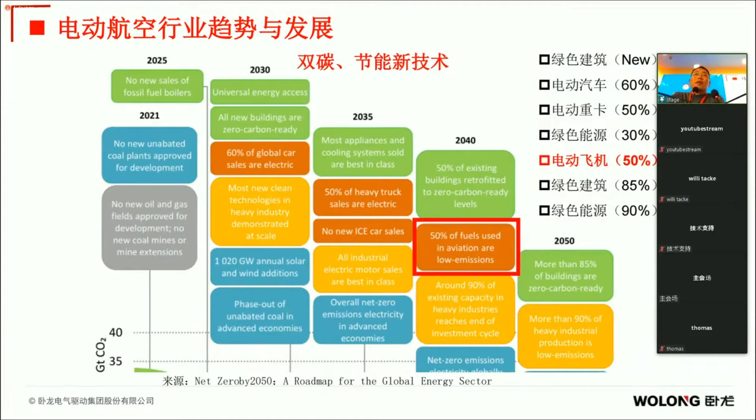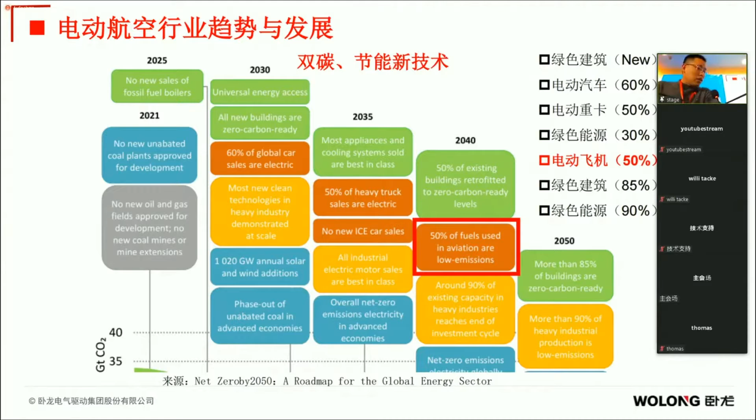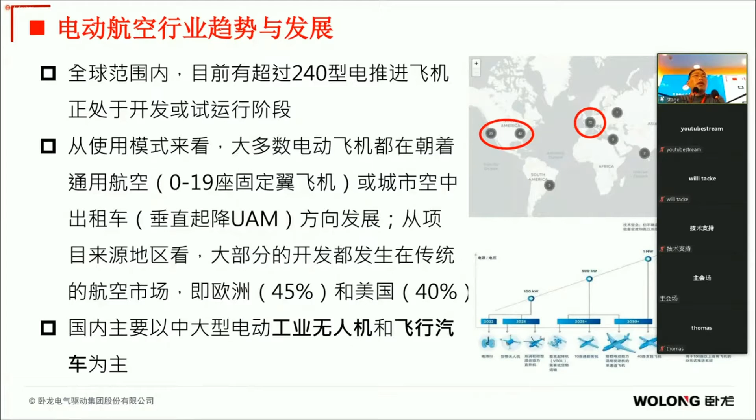First, the development and trends in electric propulsion systems. We have the dual carbon strategy - by 2040, e-flight demand will increase greatly by 50%. Worldwide we have more than 240 types of e-planes, and in China we have industrial UAVs and flying cars.

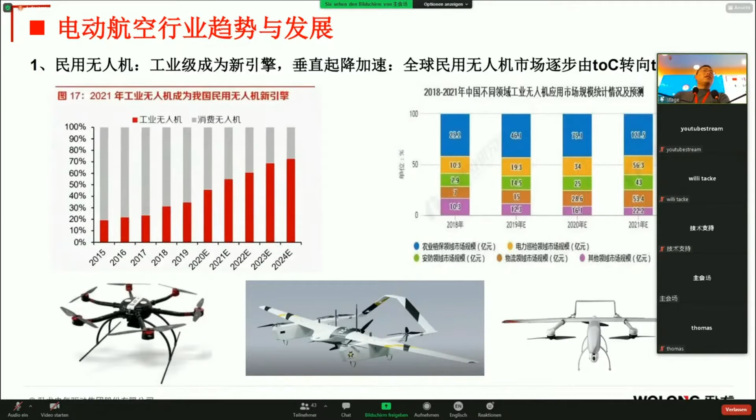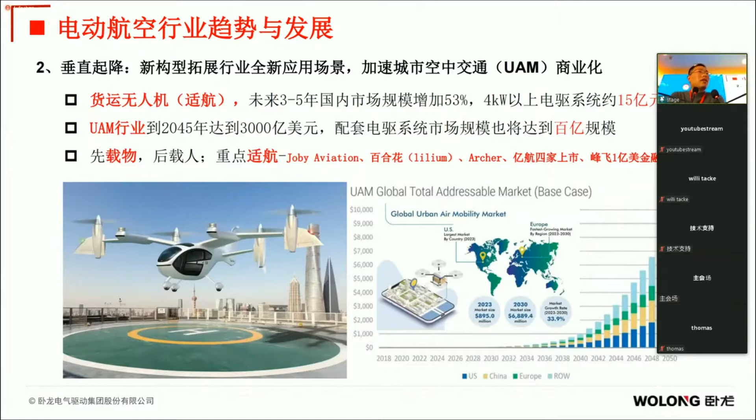For the civil UAV sector, we are transforming toward the 2B market. For vertical takeoff and flight, we have new application scenarios, and we are accelerating the commercialization of UAM with a lot of investment being poured in. This is a list of pictures showing the structures of the e-planes. In civil aviation, we are also undergoing transformation with electrification going on.

We will have hybrid systems first, then pure electric systems - electric drive - then the technological requirements for e-aviation. First, in terms of motors, we have requirements for performance.

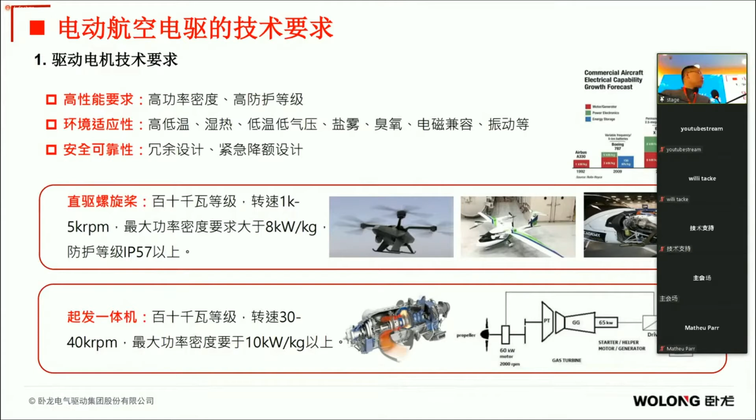I think the first requirement is the weight of the motor, then adaptability to the environment, and also redundancy design. For the direct drive propellers, regarding intensity, the power requirement is over 8 kilowatts per kilogram, and the rotation speed is about 30 to 40,000.

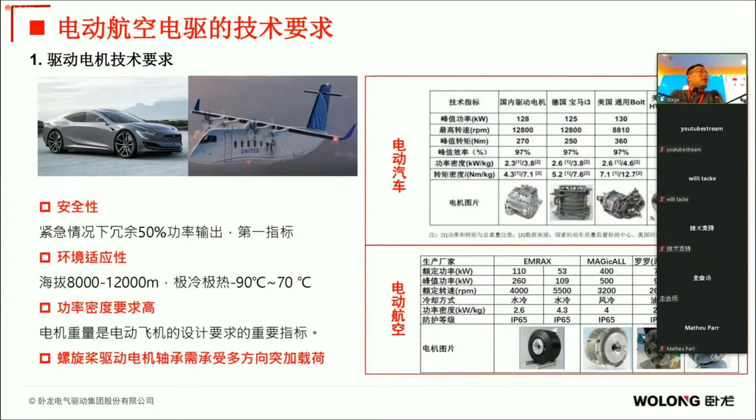So we can compare the motor of the plane to electric vehicles. The power intensity for the car is about 2 to 3, however for e-planes the requirement is about 5 to 6.

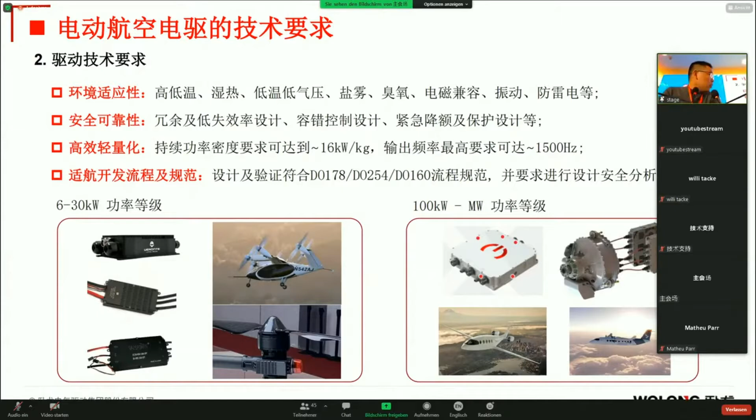Then the driving control systems and controllers - I think we have the same requirement for the controllers in terms of power density. It should be over 16 kilowatts per kilogram, and the output frequency should be 1500 hertz. We also have 6 to 30 kilowatt products in the market, and on the right-hand side, we have the 100 kilowatt to 1 megawatt power class.

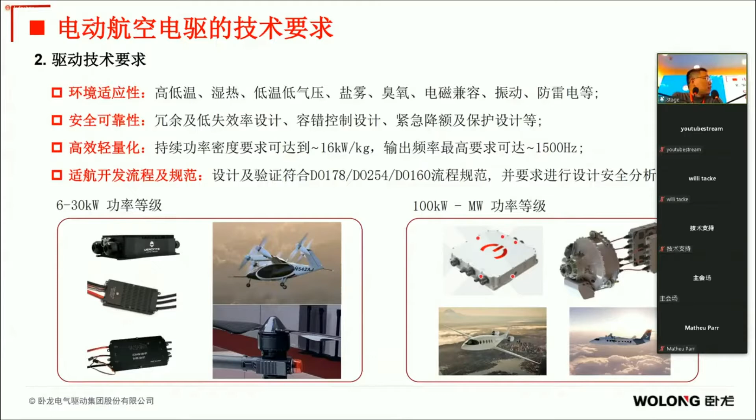For the controllers, we also have a comparison between planes and cars. For the controllers of the plane, they don't have high requirements for power, however for frequency, it should be doubled compared to the car.

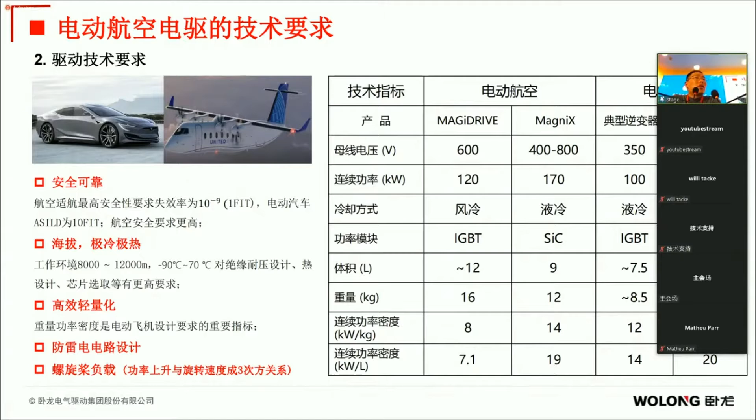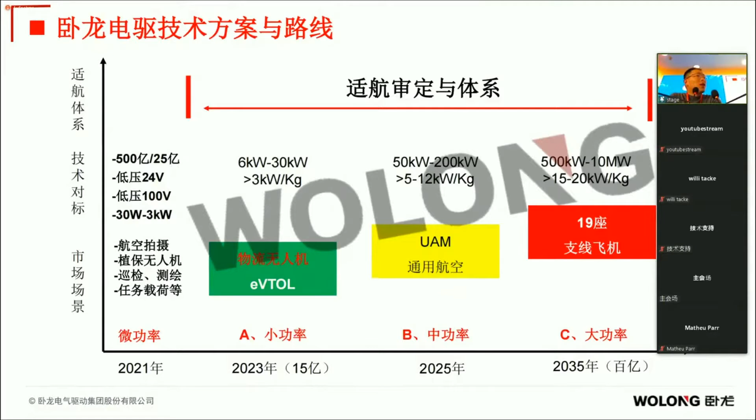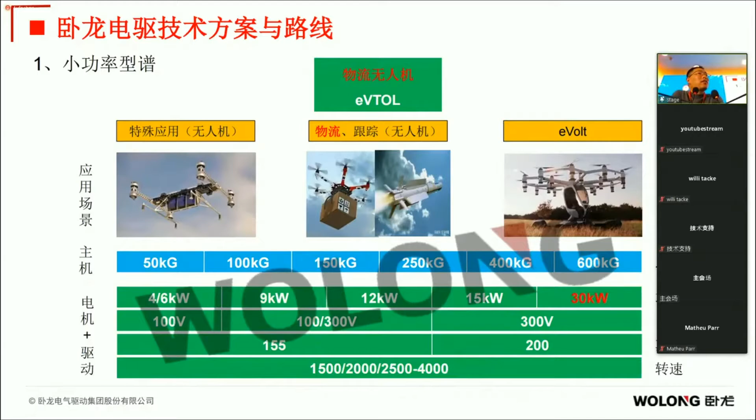And then the technology and roadmap of my company. We take into account the certifications, and we look at the plans for small, medium, and big power electric drive systems. The power can be 4,000, 9,000, 12,000, and even 30,000 watts. And the voltage ranges from 100 to 300.

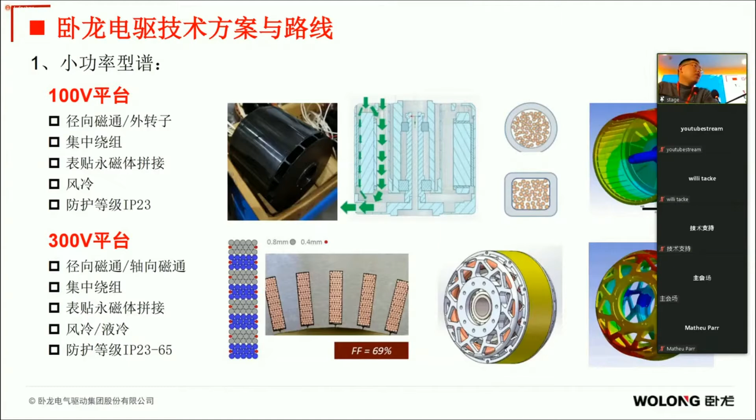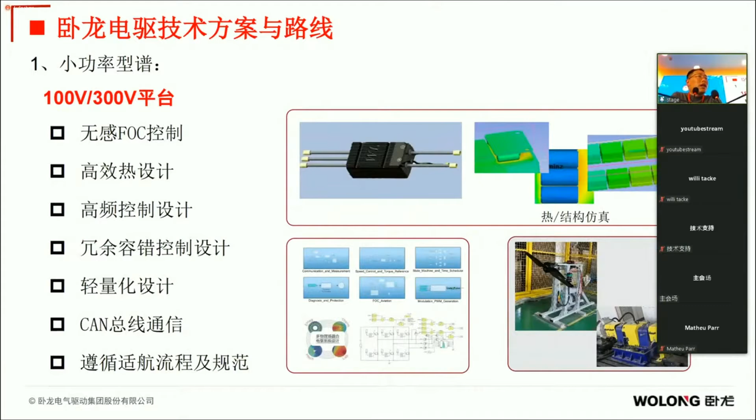We use the topology of radial flux combined with outer rotor for the 100 voltage, and for the 300 voltage we mainly use radial flux. We're transforming from IP23 to IP65 in terms of the protection class. We also have sensorless FOC control and high efficiency thermal design.

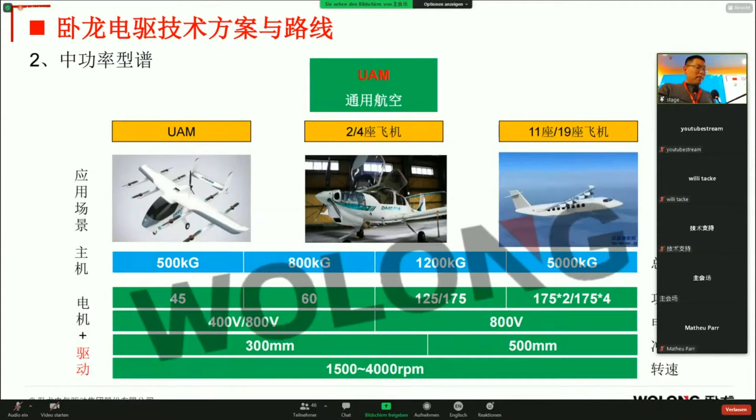In terms of the power supply, we are transforming from 45 kilowatts to 500 kilowatts, and the voltage is 400 or 800.

For the propulsion roadmap, we mainly use radial flux, and we also use flat copper wire winding and surface-mounted permanent magnet Halbach arrays. We have the 125 kilowatt design model, and in the middle we have the 70 kilowatt design models.

And for the medium power controllers, we use silicon carbide components.

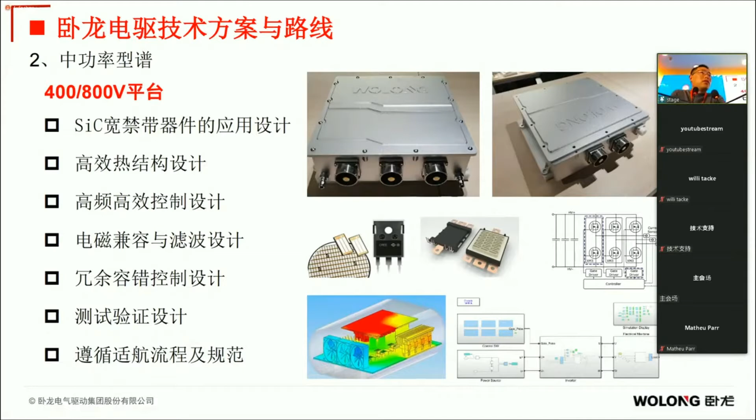For example, we have the pictures for the 100 kilowatt and 70 kilowatt electric motors, and we have tests of the e-motors, and we are upgrading the controllers. Currently, in the first half of 2021, we will have a 200 kilowatt sample motor launched.

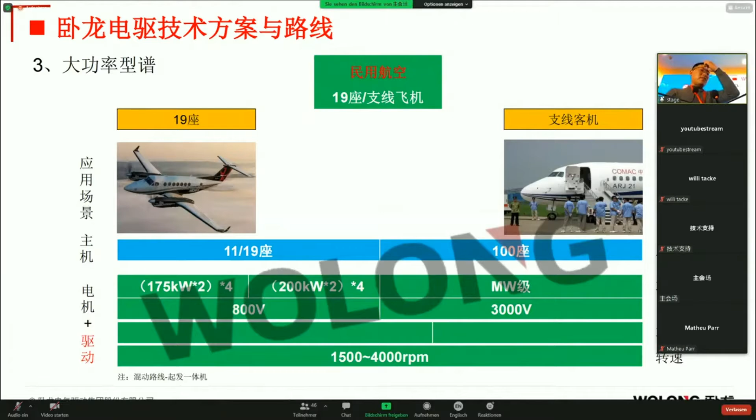We also have the million-watt class motors. For the technological roadmap, we mainly use parallel medium power motors for redundancy. And for machines over 1 million watts, we are making technological preparations.

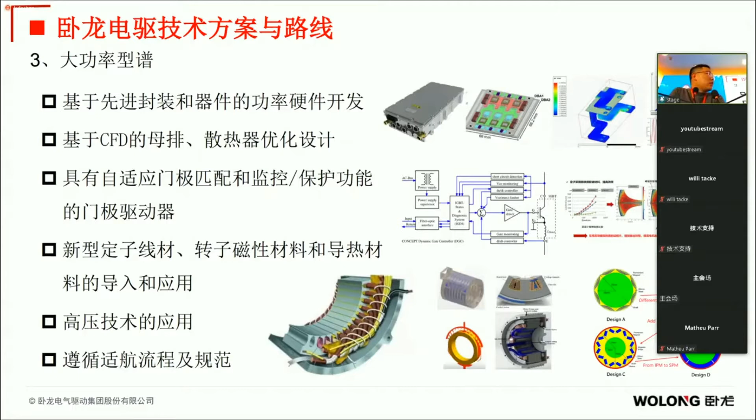And now about the conditions for Wolong electric propulsion and some cases. Actually, we have a lot of business over the world, with 57 subsidiaries and 39 manufacturing bases.

For products, our products are used in home appliances, special large motors, industrial motors, large size motors, and EV motors. We have output from motors of about 12.5 billion, the second largest in the world, and we are also working hard to become the largest in terms of motors.

In October 2018, we established the Global Center Research Institute focused on technological development. We have research centers in Shanghai and Shangyu, Zhejiang province, and we also have centers in Europe, Japan, and the US.

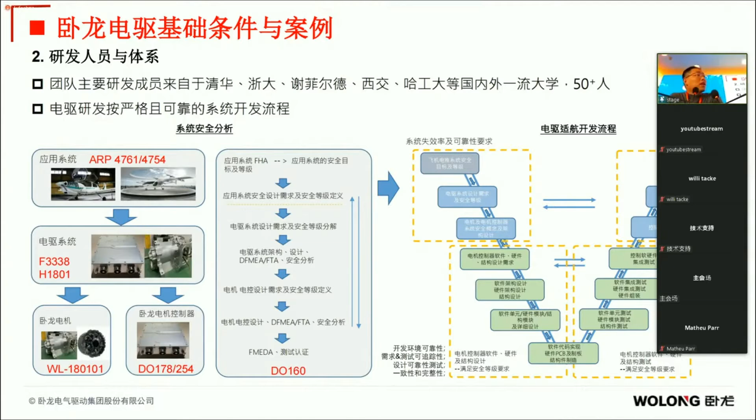Currently we have 50 staff for technology domestically, and for the e-motor products and certifications, we are developing e-propulsion systems.

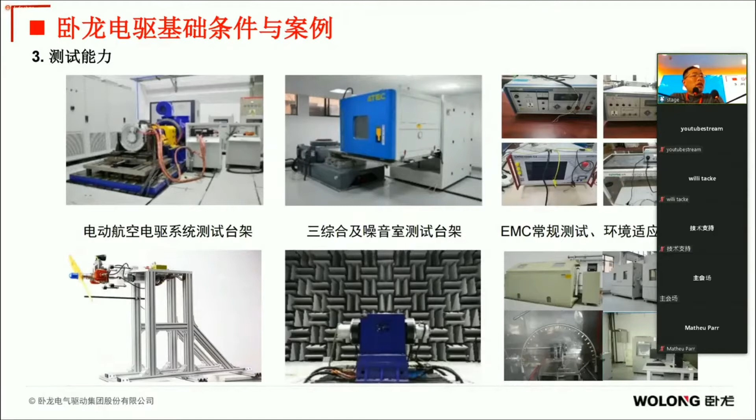And this is our lab capacity. We have supporters for different temperatures and humidities, and also propeller test supporters.

We are really honored to become a part of the technology setting committee for e-flight. We have compiled 23 documents on technology for e-flights, for example the 1801 technological protocols. We are also making new preparations for the new technological requirements of e-flight.

We have small size production and also large size manufacturing going forward. And those are our patents and papers. We're also cooperating with famous universities for technological breakthroughs.

Those are the application cases in recent 2 years. For small power, we have the 5 to 15 kilowatt systems. We're cooperating with manufacturers for propeller testing, trial flights, and test flights.

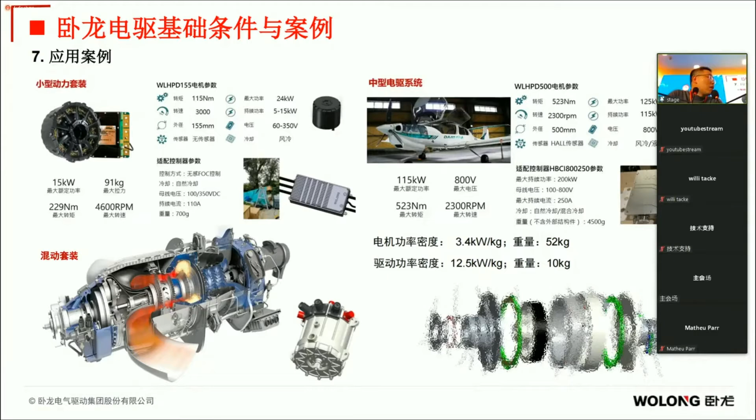In the picture on the left, this is the start and launch integrated machine. At the Shangyu plant in October, we completed testing of the 70 kilowatt motor at 36,000 RPM. As mentioned, the largest power intensity can be over 10 kilowatts per kilogram.

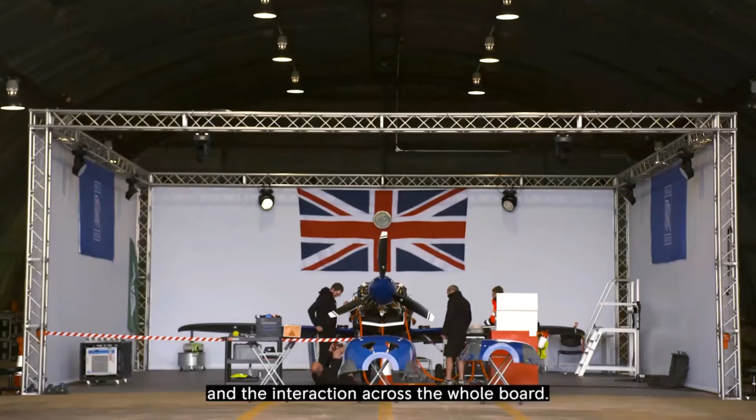This project is an attempt to break the world electric speed record. If you put 550 horsepower in a little airplane like this, it's going to go like the clappers. And it does. It's a great aeroplane to go and break records with, but also to prove the future and the next steps for electric aviation. The key thing about breaking the record is about demonstrating how fast this technology is going, and therefore how soon it's going to be in all our lives. This technology offers us the opportunity to start travelling in a really net zero way. When you look at the team and the interaction across the whole board, the engineers, project management, the ATI, the government, I've never seen a team come together and achieve what this team has done.

We've broken a record that already existed, but crucially, we've broken it by a phenomenal amount. I think it's clearly demonstrating that we're getting into the third age of aviation. Electric aviation is absolutely and utterly here to stay.

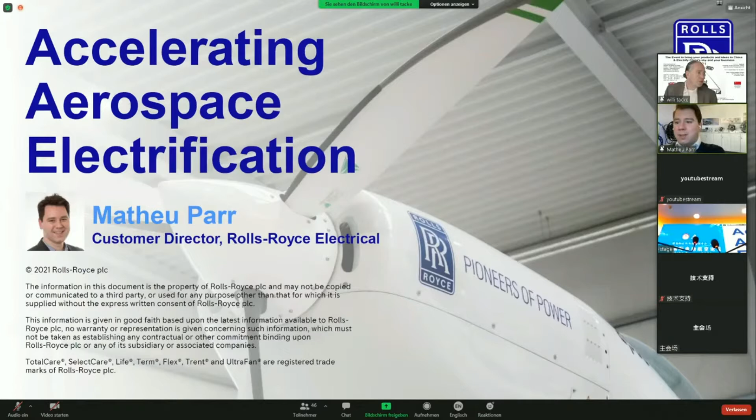Perfect. So good afternoon, everyone. Thank you so much for the opportunity to talk to you today. I'm Matheu Parr, I'm the customer director at Rolls-Royce Electrical. As Willi described, we've been investing in electrical capability for more than a decade now within Rolls-Royce across the marine and land markets. With the acquisition of Siemens e-Aircraft in 2019, we've now put together a world-class team to go and focus on the advanced air mobility markets, a team focusing on urban air mobility and regional air mobility opportunities.

I have had the great privilege for the past few years to be leading the project that you saw in the video, a project to build the world's fastest electric aircraft. We hope this is a project that inspires people, a project that shows what electrical technology is able to achieve today by breaking the record, but not just breaking it by maybe 5 or 10 miles an hour, but breaking it by more than 130 miles an hour, showing just how quickly the technology is moving forwards.

Crucially, we undertook this activity to go away and understand what was state of the art in the automotive industry, understand the baseline technology available, and also work with certification authorities to start to increase their awareness of the technology, since we would need their support to fly the aircraft. The aircraft has now flown more than 30 times, covering more than 2,200 kilometers during its flight test program.

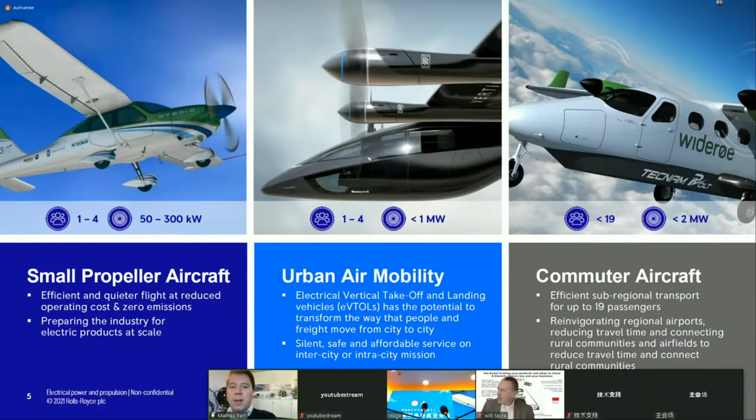Just running through some of the projects that I hope you'll see from Rolls-Royce, and if you haven't, you'll definitely see more of in the upcoming months.

This is the project we are running in Italy with Tecnam called H3PS. This is a hybrid aircraft where we are taking a Rotax combustion engine. We've attached a small 30 kilowatt motor to that Rotax engine that provides the boost power necessary for takeoff, go-around, for key flight maneuvers, but essentially allows the Rotax to run at its most optimum point and improve the fuel efficiency of the aircraft, and equally, of course, improve the range.

There is a battery on board this aircraft, of course, to work with the electric motor, and the battery can be charged in flight off the Rotax as required by the operator. We've completed ground tests of this aircraft. Hopefully it will be up and flying in the next few weeks, and you'll have an opportunity to see some footage of this aircraft flying around the skies of Italy very soon.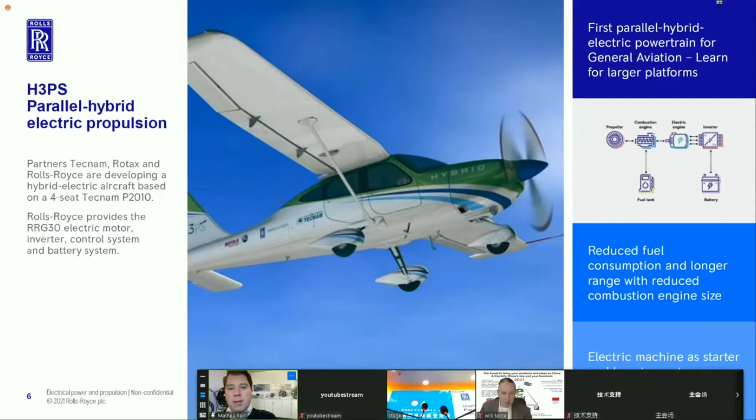We're very proud to be working with Vertical Aerospace in the UK on their urban air mobility platform, the VA-X4. This aircraft targets certification 2024, and on this aircraft, Rolls-Royce will be providing the electrical propulsion motors, the power electronics, and the electric power distribution system. Within that package, we're essentially responsible for the delivery of all thrust off the aircraft and work very closely with our launch urban air mobility customer, Vertical.

However, it is our intent to work with as many urban air mobility platforms as possible. We think our 100 kilowatt lift motor that we are designing for this market segment is highly attractive, offers the best power density and reliability, and we are very interested to talk to all airframers who are pursuing aircraft in this segment. I think the key thing about this market is the range that is trying to be undertaken.

The 120-mile range that is forecast by Vertical, we think is highly credible for what electric aviation is able to offer today, and really sets this aircraft apart from some of the other concepts that are pursuing longer ranges where we struggle to trace through the battery calculations and demonstrate that's viable.

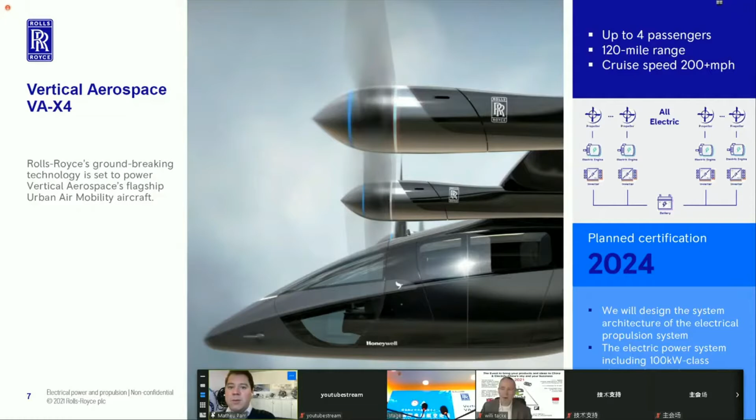The Tecnam P-Volt is another program being run with Tecnam in Italy. It's a 9-seater commuter aircraft, and here Rolls-Royce is delivering the motors, the power electronics, and the battery. This aircraft will have circa 300 kilowatt electric motors on board to drive the thrust, direct drive to the propeller. We integrate all the power electronics into the motor to give a very good packaging, as power dense as possible. This will be the first aircraft to also have a Rolls-Royce battery solution on board, with a range of around 100 nautical miles in 2025.

As battery technology improves, we're looking to extend that range out to about 150 nautical miles by 2028-2030. We see lots of excitement in the market for this aircraft, particularly from airlines who want to learn how to operate an electric aircraft, who have island hopping or short city routes where that range works for them, and crucially it gives them an opportunity to start to understand operation, maintenance, pilot training - how do you start to understand an electric aircraft within your fleet?

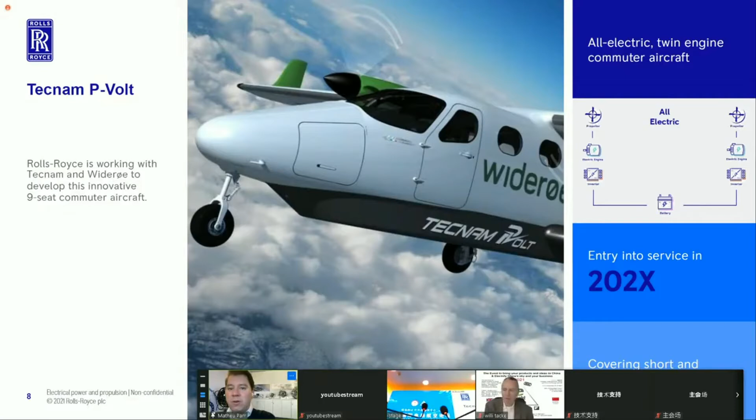For Rolls-Royce, however, when we look at this market, we recognize that the electric propulsion system is only one component of the overall solution. We need to also think about how we are going to charge these aircraft, how we are going to ensure the fast turnaround times that we expect our customers to require to get the utilization of the air asset up as high as possible. We also recognize there are limitations in regional airfields today in terms of electrical infrastructure - there may not be enough energy coming into the sites to allow for all the aircraft that are planned to be charged fast enough and continue operations.

We've therefore invested in a microgrid approach. Working with Rolls-Royce Power Systems in the Rolls-Royce group, we have developed a containerized solution that allows you to install either batteries or hydrogen fuel cells on site, together with the charging infrastructure necessary to keep the aircraft in the air. We think this offers some fantastic benefits in terms of being able to plan and optimize around the energy cost.

To be able to demonstrate to customers that as well as flying in a zero emission all electric aircraft, you are also charging that aircraft in a net zero manner. If we have any issues with quality of supply at the site, that can be assured through the fact that we're bringing dedicated power supply through. And where this is used in combination with renewables, with solar or wind, it also offers a regional airport the opportunity to start to generate electricity and then sell it into the grid to generate new revenue streams.

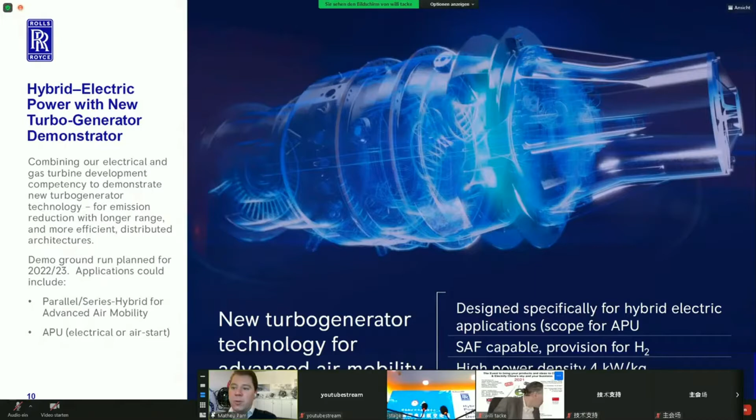I mentioned at the beginning as well, we are not just focused on all electric solutions, we are also focused on hybrid electric solutions. We are currently investing in a turbo generator demonstrator where we are designing, we believe for the first time, a gas turbine together with electrical machine specifically for the urban air mobility and the regional air mobility market segment. So we're taking in requirements from customers - what do they see as the turbo generator requirement in their market segment - and feeding that into a design program.

The gas turbine itself, we believe, is targeting market leading power density at 4 kilowatts per kilogram for the full integrated system. We are going to ensure that the machine is capable of running on sustainable aviation fuels and also have a provision for burning hydrogen, should that be the decision that the platformer wishes to take. Of course, this machine is also ideally suited as an APU in larger aircraft, and we're engaging with customers right now to get more about their requirements and be able to feed them into our design activity.

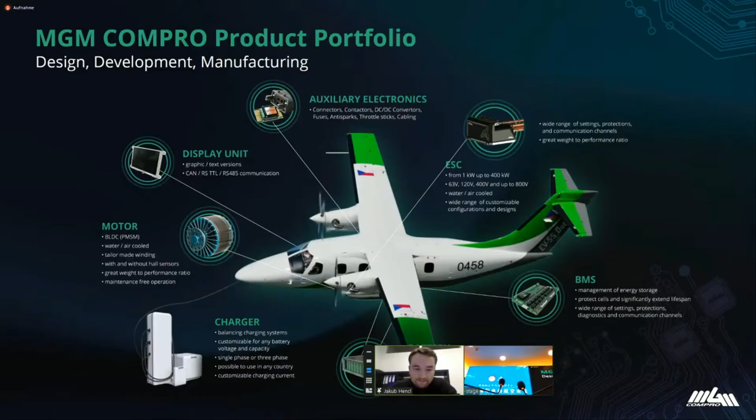Willi, please, next slide. So here we can have a look at the different fields of e-aviation we're active in. Right now, a very famous field, the eVTOLs, where maybe more than 150 projects are active. MGM Compro is running 15 projects here, where the motor power ranges from 20 to 80 kilowatts in general. We can say that this is really the forefront of e-aviation technology, and all the major players are active here. So we try to catch up with them and come up with complex solutions for e-propulsion systems. The field where it started, I would say, was in 2011 with the first Airbus projects of electric aircraft.

It's a light sport aircraft, or we can say the UL 600 kilogram category, where we have already 21 flying projects. Some of them are going towards serial production, some of them already quit, but this was a field where we gained a lot of knowledge.

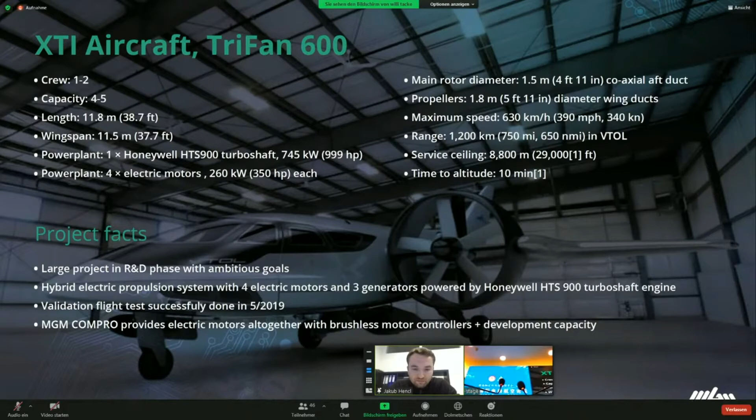This is, I would say, one of the biggest projects we work on in the field of eVTOLs. This is the XTI Aircraft TriFan 600. This is a very ambitious, large project. There's also close cooperation with Honeywell, and the hybrid electric propulsion system should include 4 electric motors, which is our part. So we deliver the motor controllers plus electric motors with a very sophisticated control system and controller firmware, which is very customized for this particular purpose. Next slide, please.

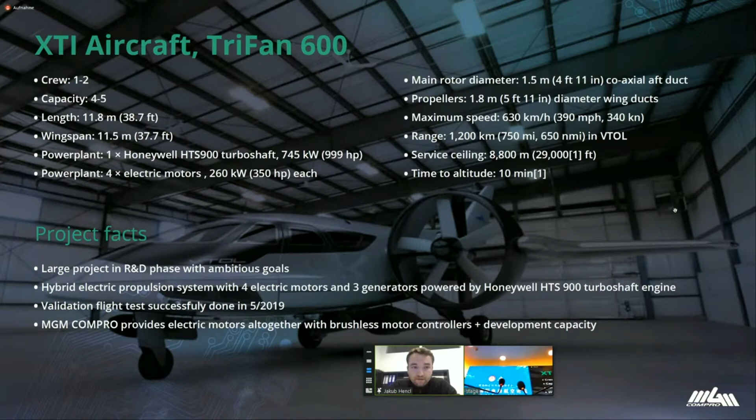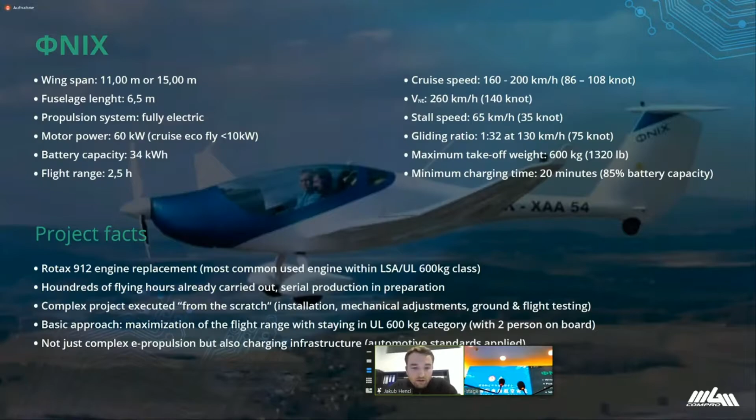Phoenix project, one of our favorite projects in the UL 600 kilogram class aircraft. This is a nice 2-seater. The development started in 2018, and the aircraft was flying the same year, its maiden flight. The aircraft and the overall system is ready for serial production.

So may you try to share your screen, and if it works, I'll mute and leave. Yeah, or shall I play the video? Let's see - now it's perfect. It's there. So I'll go off and leave you the stage. Thank you very much.

Yeah, my attempt is a bit shorter and less about proposing our own company. It's more that I try to give you some information about what is important from the point of view of propeller manufacturers, for electric flight aircraft designers, when they think about a propeller and what to take care of.

Before these few pictures of what Helix is producing - it traditionally comes from light sport aviation, maybe similar to many other eVTOL manufacturers, and powered paragliders, which gives us a chance to produce thousands of propellers. In fact, we send out 40 propellers every day. But from a company revenue perspective, it's also the heavier aircraft, LSA or the 600 kilogram class, which takes quite a lot of our propellers, and gyrocopters - something lately invented but very commonly used.

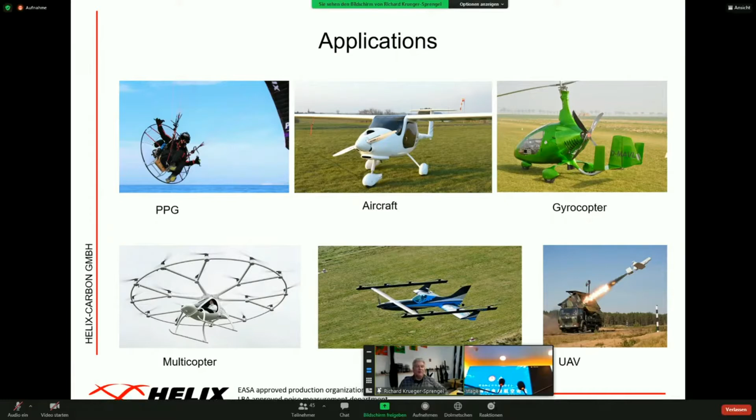Upcoming, of course, is the eVTOL, the multicopters. You all know about this Volocopter project, which I supported from the beginning and tried to push in the biggest possible dimension. Nowadays, I see that they are quite far along in this business.

The majority of eVTOL manufacturers found out that it's important to have eVTOLs flying straight forward with a separate lift unit. This project, like you may remember from yesterday, from eMagic, from MCAR Technology, is a good example for me to tell about technical details. Of course, there are quite a lot of other applications too, like UAVs for military or civil usage.

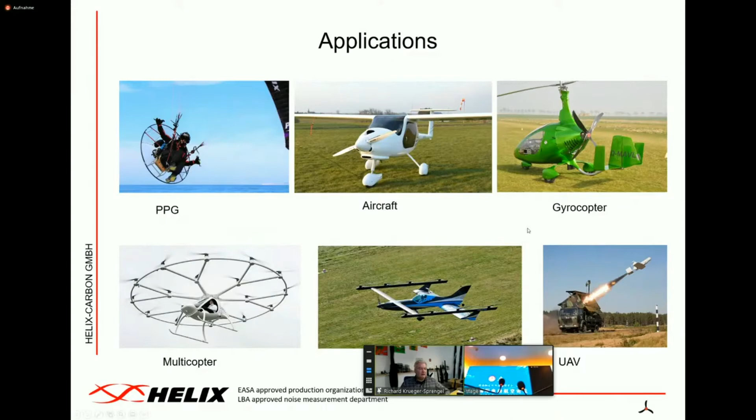Characteristic of the problematic, or let's say the unknown issues around the propeller - vertical flying is difficult because it's not well experienced. It's new that we try to control aircraft via propeller speed, and additionally caused by the little energy we can take up in the air, it's absolutely essential to have the best efficiency and properties during the lift phase, but also during the transition to go forward. This leads to very special propellers, which may be very slim or have a very special design.

What we found out is that calculation is the basis for the new propeller. It's, of course, very important to start with the correct first propeller, but afterwards the simulation ends up a little bit in the next prototype. We need to make a master plan for different iterations, meaning a variation of chord lengths, of diameter, of profile arrangement. So the geometry of one best propeller comes from an evolution of many propellers which we needed to produce before.

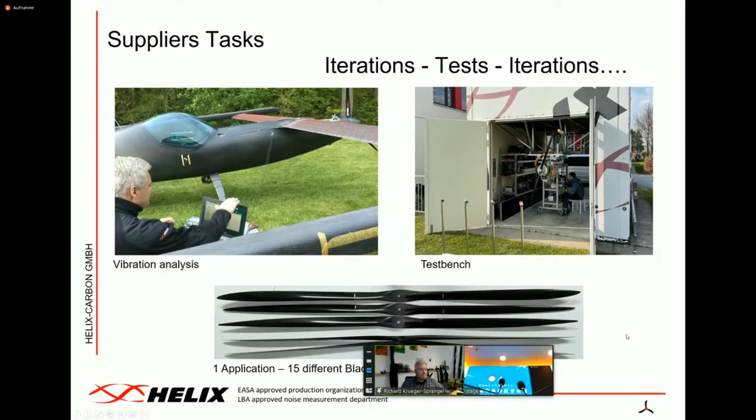Another issue is what could we do as a propeller manufacturer or an aircraft designer to make things better? One of these things is to optimize the behavior of the propeller or the complete aircraft during transition. After takeoff, acceleration forward is relatively easy, but it is a curious thing to start propellers which were aligned during cruise flight into action to transit into slowly flying, or let's say stop the aircraft right up in the air.

Because the airflow from the side to the propeller does not hurt the propeller much, but oscillation and vibrations go into the structure of the aircraft. And as long as the aircraft is a UAV, maybe nobody realizes this fact. But I'm quite sure that in case passengers fly inside the eVTOL, which transits from fast flying to slow flying, they might be a bit worried by the vibrations they observe.

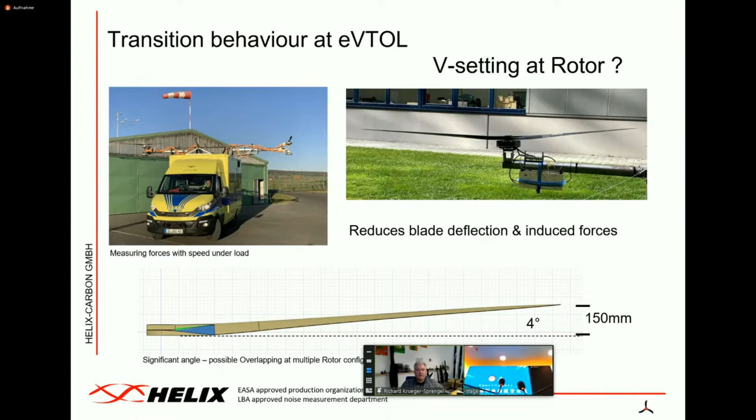Another issue related to propeller design technology is, in case you design eVTOLs, you must think about efficiency, the maximum lift you can get out of the weight of the material you invest. Nearly all aircraft manufacturers requested us to receive the most lightweight propeller ever, because every gram is difficult to bring up in the air. From my point of view, things changed a little bit since we analyzed not only geometry iterations, but also what kind of structure can give the same geometry to modify the behavior.

What we found out is we can create propellers with nearly the same geometry such that they consume the same energy during running, but having an efficiency with a wide difference from what we expected. It is up to, let's say, 10%, 12% more lift we can get from the same energy we invest, by creating a propeller around 30% heavier, meaning we invest more in stiffness, which is the first clue. The second one is to modify the fiber layup in the propeller in the best way.

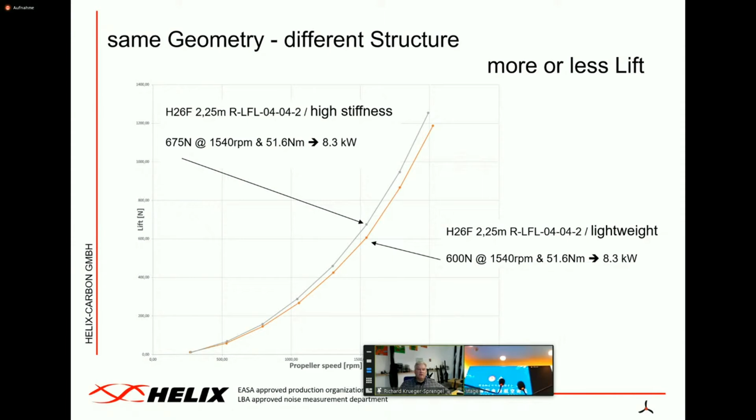Therefore, we left long ago the idea to use just carbon fiber for this issue. It is mostly ultra-high modulus carbon fiber, which is much stiffer than standard carbon, and lets us realize structures helping the propeller business very, very much.

In the end, it is important to think about who creates the eVTOL rotors. As a realistic manufacturer selling thousands of propellers, I know that the price must be correct for the correct serial product. But now nearly all eVTOL manufacturers are in the phase of creating the product, modifying, testing, and trying to be the best and fastest in presenting a good solution for the future public.

In this phase, it is of course my suggestion to use the company Helix as a research and development partner, maybe with the clue that we are EASA certified and can present you the prototype where the permit to fly is probably easier to get.

But with a view on the market, we see that in general aviation, all aircraft manufacturers trust their suppliers to receive the correctly developed propeller, because they separate their business from the propeller business. In the helicopter market, which is also close to e-flight, the technology is so important, difficult, and special that from what I know, 100% of helicopter manufacturers produce their own rotors because it's their core technology, and they produce it in serial numbers.

Just one slide about my institute. The important thing I always want to highlight is that we are not about fundamental research, but we started doing a lot of flight testing on fixed wing aircraft, owning projects from companies, and then we also added some international projects.

We are working on UAVs where we provided the full flight control system. We also make strange things like our own missiles, which we fly and control. We also add to small UAVs internationally, and a helicopter, currently 600 kilograms, which we are supposed to fly unmanned.

And of course, the big business is the eVTOLs, and with the eVTOLs, it's the most exciting things, but the companies also don't want you to talk about them.

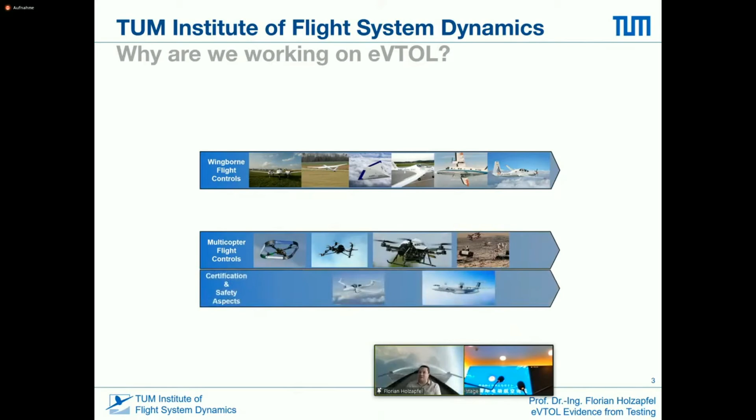The reason why we entered the business once again: we did a lot of flight control for wing-borne aircraft, we did flight controls for multicopters, and beyond that we had to deal with safety and certification aspects. If you see this as a serious business, then especially this last part is very important. When you bring wing-borne and multicopter together, you have transition vehicles already, and when you add the certification aspect, you end up with all the spices you need for the eVTOLs.

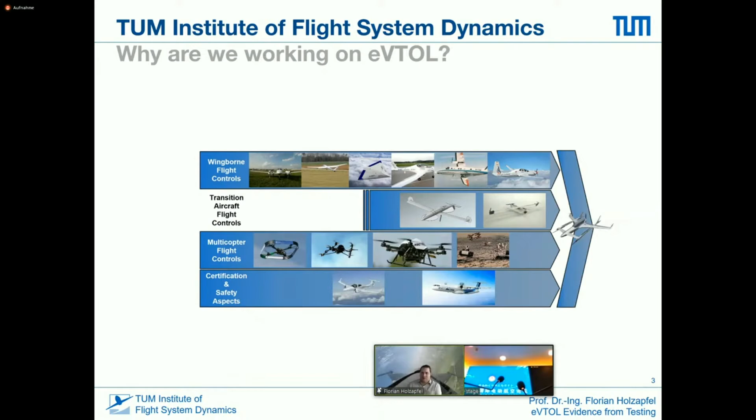Our typical tasks as an institute in industrial projects are to do modeling and simulation upfront, and then later, when the system is flying, system identification. Another thing we do is ground tests and hardware-in-the-loop tests of components, so you have high confidence and high maturity before you go really flying.

When it comes to system architectures, we deal with redundancy management and safety analysis of the systems. Then, of course, our core discipline is to provide flight control functions for the nominal flight control system, but also for emergency controls. Beyond that, as already addressed, hardware-in-the-loop simulations with complete setups.

It's also important to mention that it's not like a university experimental playground, but we do this together with companies that are providing the hardware-in-the-loop systems for the certification of large Part 25 or fighter airplanes.

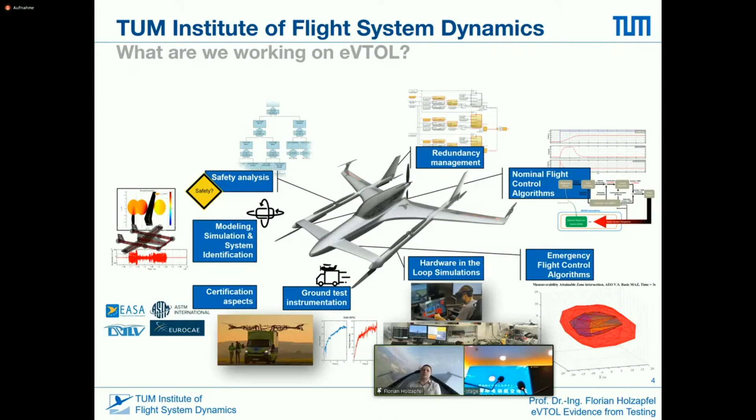And then, of course, we are dealing with certification aspects where we are talking to both EASA, then in Germany also DULV, and the FAA in the United States, and where we are contributing to working groups within ASTM F44 and the EUROCAE Working Group 112.

For today's statement, it's a little bit about looking at propulsive and aerodynamic effects, where at my institute, it's not about doing complex CFD calculations, which are very important and make sense, but what we try to do is make first principle models with a low number of parameters.

Later, when you do simple tests and measurements, it will be much easier to match them with the measurements to have verified and validated models, especially for developing flight controls and producing evidence like, for example, for load calculation.

Beyond normal propeller aerodynamics, you have to look at the interactions with the airframes, the interactions between propellers mutually, and very importantly, the aeroelasticity. This is something Richard already addressed, the very high vibration level you get in strong slipstream conditions, and basically the transient inflow dynamics.

And of course, for hovering systems, it does not help for transition vehicles if you only have aerodynamics between 5 and 20 degrees angle of attack.

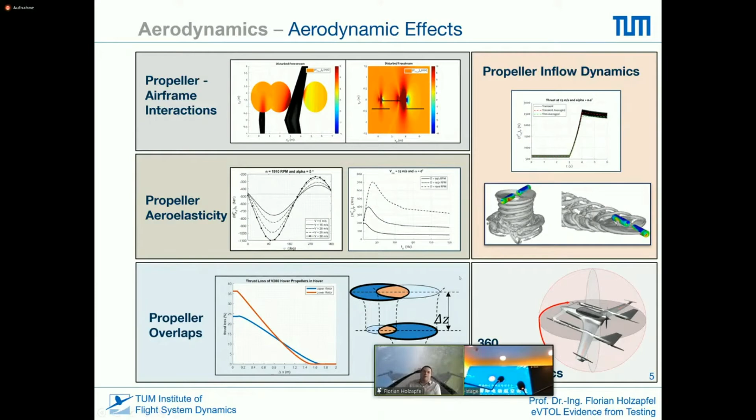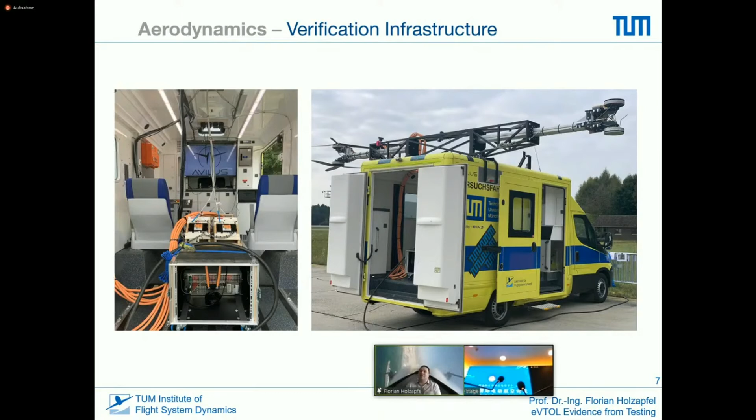As I said, one of our big assets is our new test truck, which we established together with a new startup company we founded together with an investor to build a new eVTOL aircraft. As I mentioned, motors, motor controllers, and electric systems are from MGM, where we profit a lot from their great know-how, patience, and consulting, and the same holds for the propellers.

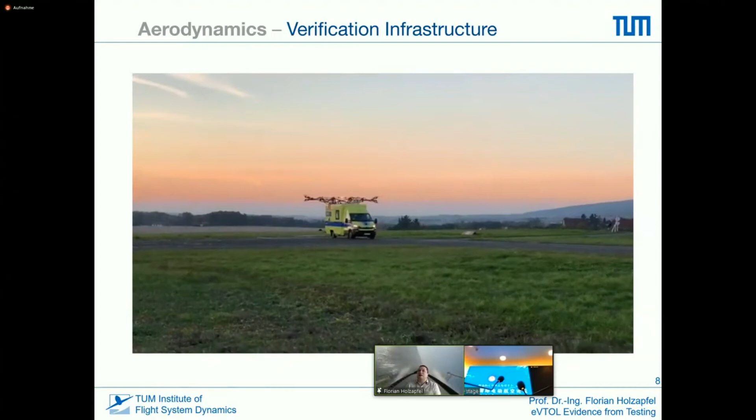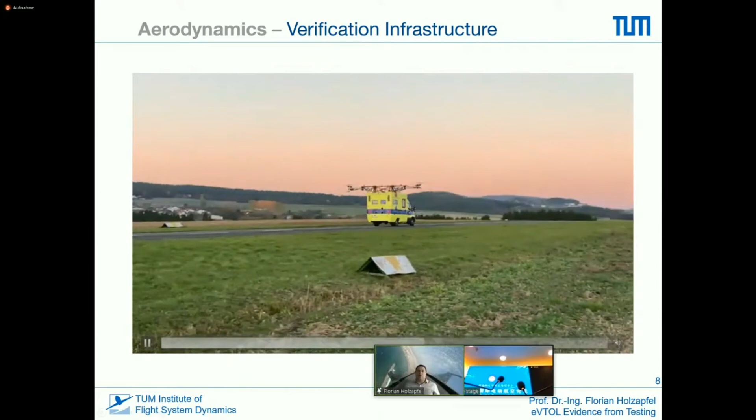So I don't know, the video is not too spectacular, but one interesting thing is, you can't hear the sound, but one of the really interesting points is that as the dynamic pressure builds up, the noise level increases tremendously. This is proof that the vibration level also gets high, and we measure the vibrations via IMU, so we can look closely at the vibration spectra.

But one of the big things I really want to highlight, because it's something you don't see if you fly small subscale models, and which gets tremendously worse as you go towards large systems, is the pitching moments you get when the airspeed increases, when you have a slipstream condition—when the propeller gets airflow from the side.

So for a vehicle with 12 propellers, on just one propeller you already get pitching-up moments on the order of 100 Newton meters. And I know from many eVTOL companies, who don't really admit it publicly, that they are having severe problems due to these effects.

And all these challenges aren't really bad, because if you address them properly, they can be overcome. Again, this is a point where I'm very happy that, for example, with Helix, we have an open and serious partner, so we can talk about these things.

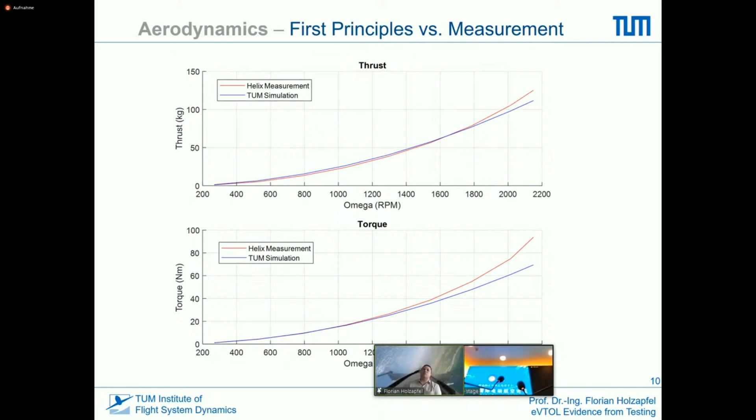Then there's the first principle model, a very simple model. To not get an easy match later with the measurements, we produced this curve before we had the measurements. The interesting point is that for a large range of RPM, the match is quite good. For the higher RPM, we are now investigating which Mach number correction and which elasticity correction we'd need to add to the model to improve the match at higher RPM.

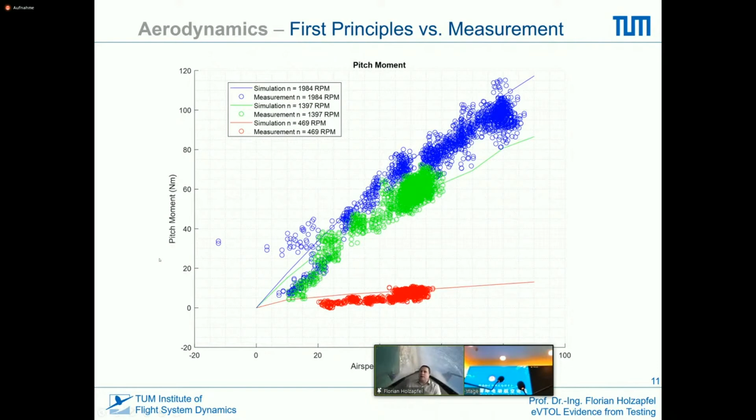But the important thing is that you're not only doing this for components, but also on an aircraft level. So as soon as you have flight test data, you try to match the aerodynamic data of the real aircraft.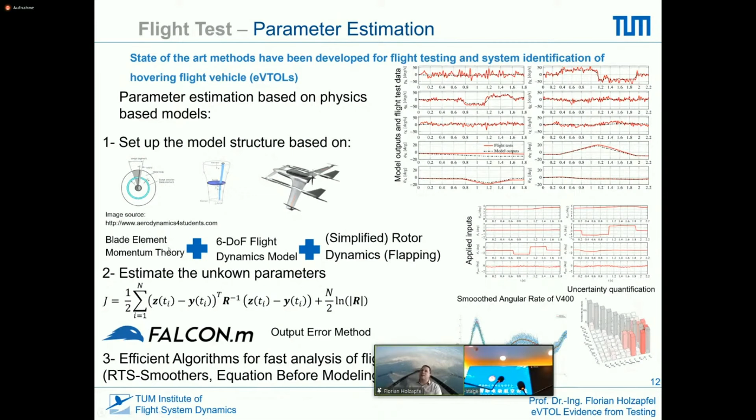The challenge here is that because of the vibration, the recorded data, especially in transition, is very, very noisy. I'd say we are now at a very mature stage when it comes to this parameter estimation. Just to highlight it, for the real transition of a 400 kilogram eVTOL, you see the raw data and then the results we got after smoothing.

Based on this, we can build a really high fidelity aerodynamic model, which allows you to produce a flight controller with very high confidence.

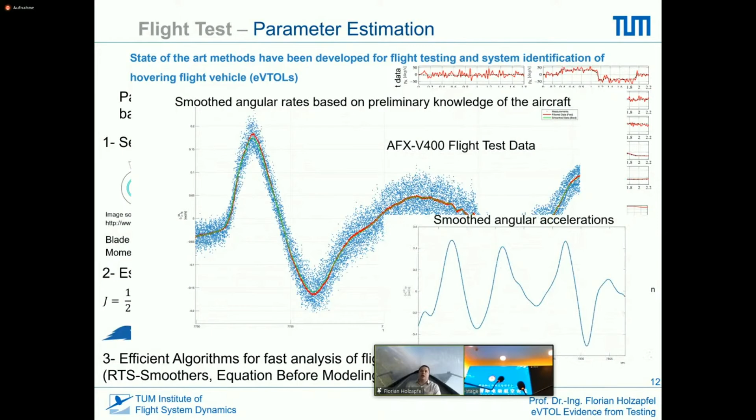Another speciality is that we do not only reproduce the aerodynamics, but, as it's very important for these vehicles, we also actively reproduce the vibration spectrum, so that in simulation we don't just produce fake vibrations, but make sure our simulated vibration spectra really match the actually measured vibration spectra in the frequency domain.

By that, we get a lot of advantage when it comes to designing noise filters and sensor filters for the flight controller. But it's also helpful for other issues, like estimating the impact of vibrations on the loads. I'll have another slide on loads later.

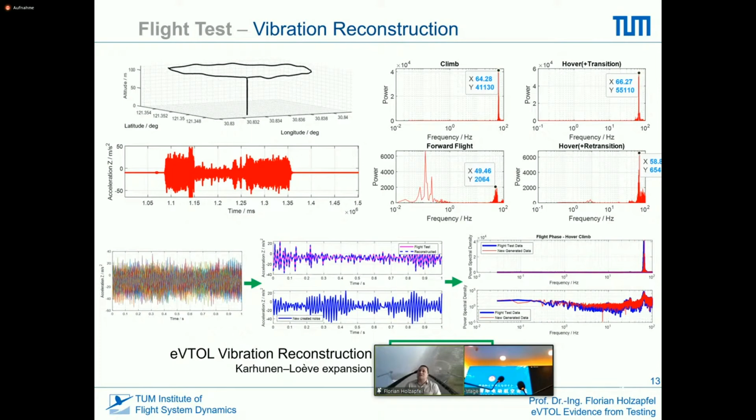One of the big points, and this is one of the cool things for us, is that eVTOLs are quite new, so there's still a lot of uncertainty involved. It's very important that you don't pretend to know everything exactly, but actively manage the uncertainty. This means that for all parameters, we don't assume a fixed value, but assume they are uncertain and therefore have a certain probability distribution. For that, we developed a new methodology that didn't exist before.

And of course, it wouldn't help to have an uncertain model if you didn't carry that through to the analysis.

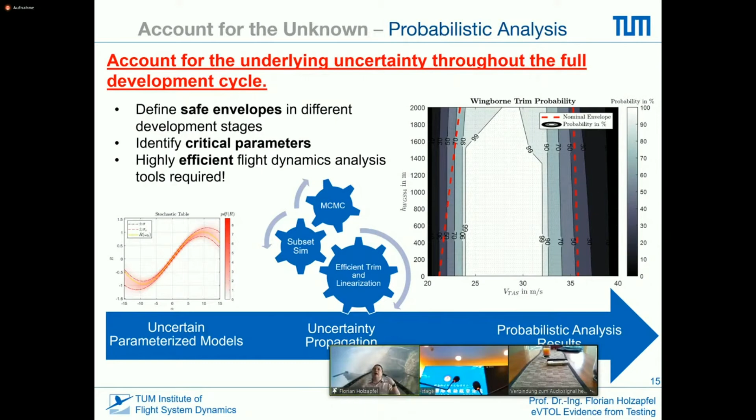So therefore, we can do all our analysis probabilistically. What does it mean? It means if we have certain requirements, we can state what is the probability at which a requirement is violated at a certain point of the envelope. This helps you control your safety and define your first flight envelope, how you slowly expand it, what points you can test with high confidence, and where you have to be more cautious.

Another important new thing for eVTOLs is dynamic loads, which don't matter much for small eVTOLs but start to matter for large vehicles. There's an additional time delay between your command to a propeller and the resulting control moment. If you just make a controller that flies fine, it doesn't hurt much, but if you move towards stability margin proofs for certification, these elastic delays start to hurt you. The earlier you account for them, the more realistic your work, and the higher the confidence that you can prove sufficient stability margins.

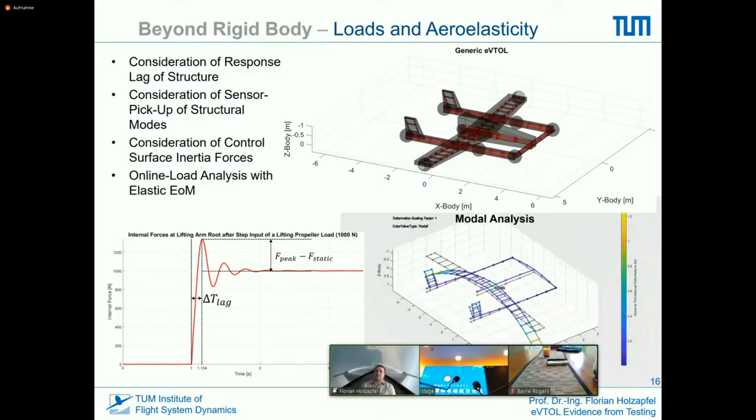Another important thing is the pitch-up moments and other load cases that eVTOLs produce, which are not known from classic airplanes and should really be addressed by calculation, because the results do not necessarily match intuitive expectations.

Finally, you have to continue your modeling toward all the relevant subsystems. This closes the loop again with MGM Compro, because you also need high quality battery models where your simulation model matches what you measure. You take electric loads, for example, to stress single battery cells and so on, and make a thermal model, an electric model, and so on.

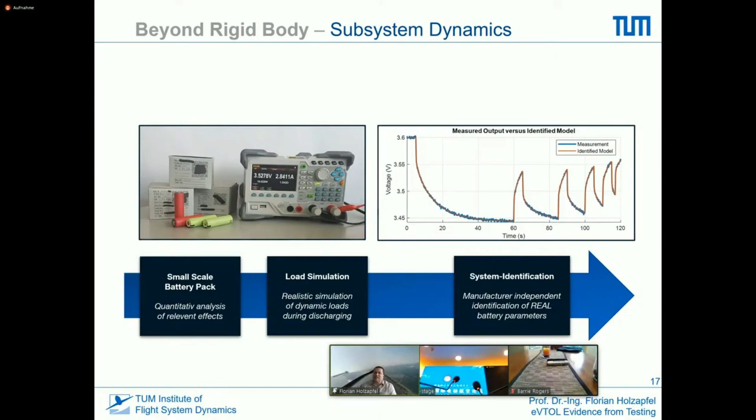Our next step, which we want to do within the next couple of weeks, is full closed loop mission simulation, hardware in the loop, for hover flights with the real propellers and the real electrical system in the loop. This lets us check if our models are correct for the whole closed loop. The purpose is to be sure that when we fly for the first time with the real aircraft, everything behaves as expected.